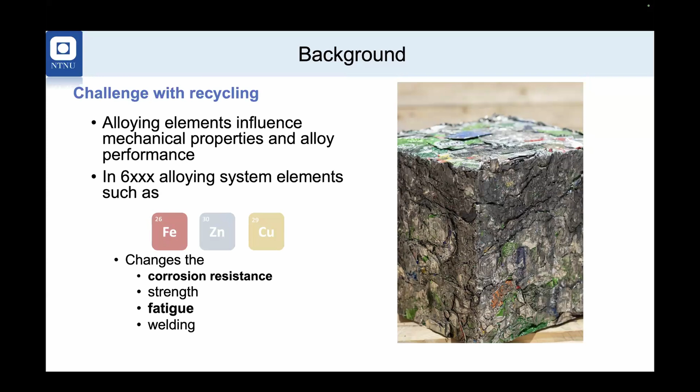And also, if you notice, Norway has a long coastline, so whenever we consider components for fatigue sensitive applications, it also comes along with corrosion. So for better design, it's imperative that we consider both fatigue and corrosion hand in hand. So to do that, first of all, let me introduce the type of alloys that we use.

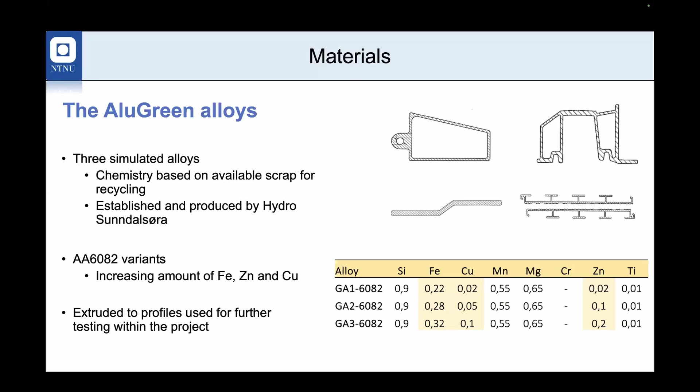Basically, we use 3 simulated alloys where, rather than using post-consumer scraps, we systematically increase the impurity elements like iron, copper, and zinc, so that it resembles post-consumer scrap. And the material is available to us in extruded condition. And what we considered is the variant GA3. This variant basically has the highest amount of impurity elements in terms of iron, copper, and zinc.

And basically, we carried out a high cycle fatigue test, as you can see here. And the specimens were extracted perpendicular to the extrusion direction. And additionally, we did some pre-corrosion, where we subject the material to intergranular corrosion as per method B in ISO for several different durations, like 1 hour, 4 hours, 12 and 24 hours. And we use 2 different conditions. One is as extruded without any surface treatment, and the second is as extruded followed by a surface treatment, that is glass bead blasted.

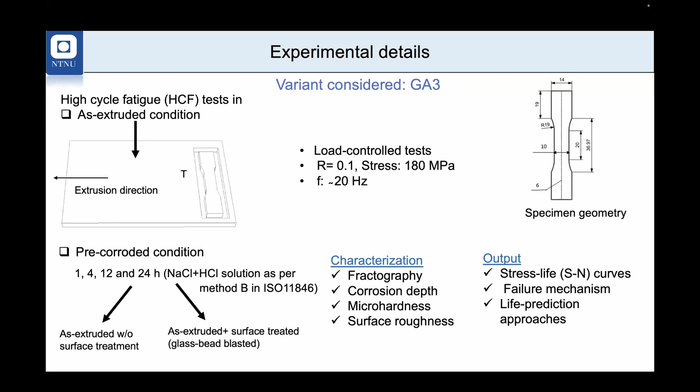And the fatigue testing we did at an R ratio of 0.1 at a stress of 180 MPa, and you can see the specimen geometry here. So we did a thorough microstructural characterization in terms of corrosion depth, micro hardness, post-fracture fractography, and surface roughness. And these are the outputs that we received: the stress life curve, failure mechanism, life prediction approaches. So before I go into the details, I want to show you some of the microstructure.

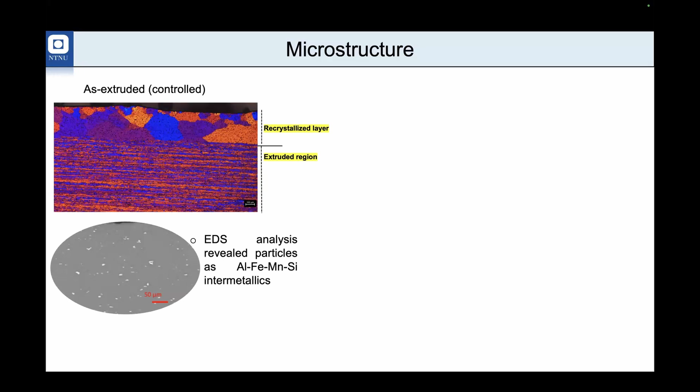This is the as extruded microstructure. As you can see, at the surface we have a recrystallized layer, with very big grains along with some small grains. And the recrystallized layer is followed by the extruded region, which has a very fibrous microstructure consisting of elongated grains. And also we have particles, which are basically iron-rich intermetallics, as revealed by EDS analysis.

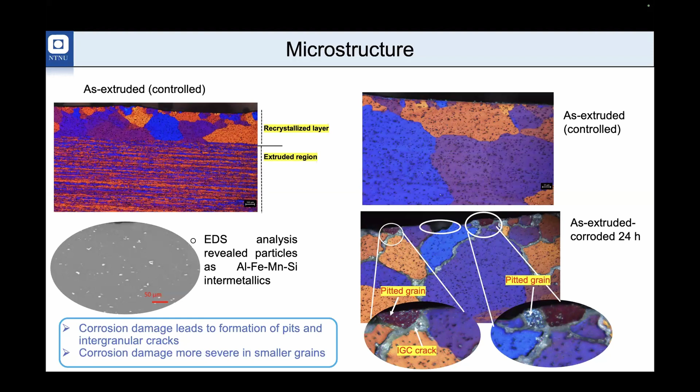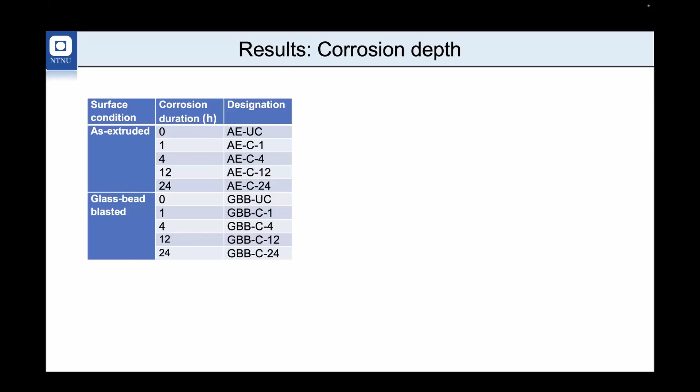And in contrast, if you see the microstructure of the corroded materials, it is different. You can see that there is significant intergranular corrosion, pits appearing especially in the surface region in the smaller grains, and also intergranular cracks appearing from there and then moving towards the interior. And we have used this designation so that we can characterize the conditions in a better manner for different corrosion durations.

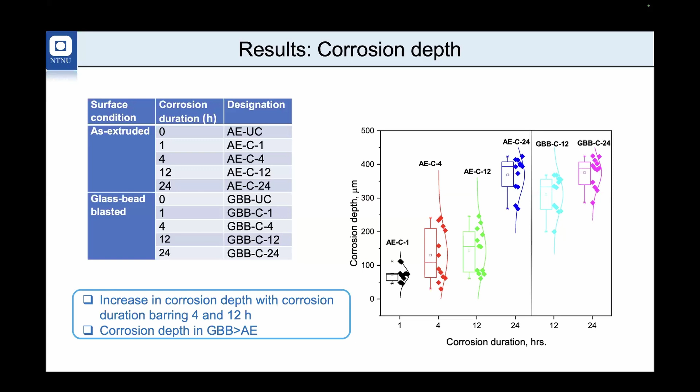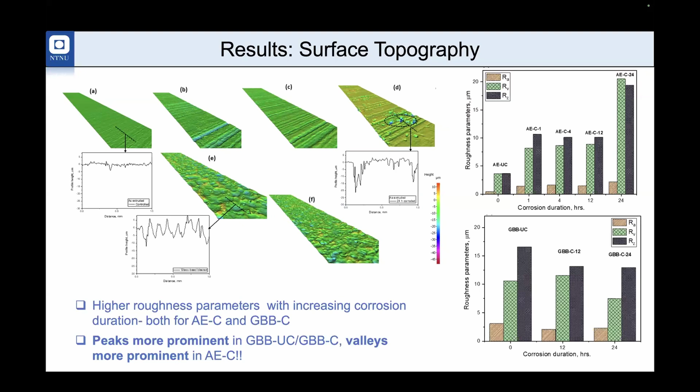Why is that? Because in case of the glass bead blasted condition, because of the impact of the blasting, the surface roughness itself is quite high, and it is characterized by the peaks. And when the material is corroded, the height of the peaks decreases. That's why this reduces the surface roughness.

We also did some microhardness characterization on the material, and you can see that the microhardness shows an increasing trend followed by a decrease, which marks the transition from the recrystallized to the extruded zone. And for the glass bead blasted, the microhardness is obviously higher compared to the controlled condition. The reason is that glass bead blasting induces some compressive residual stress and also work hardening. So obviously it would increase the microhardness.

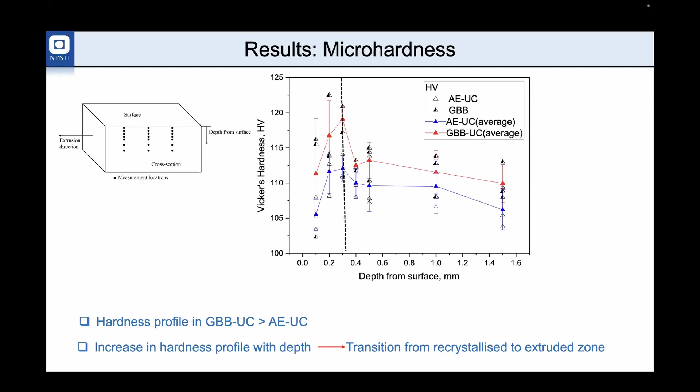Now I'll come to the main result, that's the fatigue. If you see the graph here, I have also superimposed the variation of the corrosion depth so that you can try to correlate how the fatigue life changes with corrosion duration vis-a-vis corrosion depth. With increase in corrosion duration, there is a drastic reduction in fatigue life, especially for a smaller corrosion duration, 1 hour, followed by a sort of saturating trend.

Surprisingly, the corrosion depth increases almost consistently with increase in corrosion duration. So even though there is an inverse correlation between fatigue life and corrosion duration or corrosion depth, this inverse correlation is not exactly synchronous.

And why is that? That's because fatigue is a very local damage. It requires a very small amount, just maybe 2 or 3 corrosion pits or a tiny intergranular crack itself, to initiate the crack. So even if there is a further increase in corrosion damage in terms of maximum corrosion depth, that is not very influential in further accelerating the fatigue damage. In other words, the fatigue damage gets saturated.

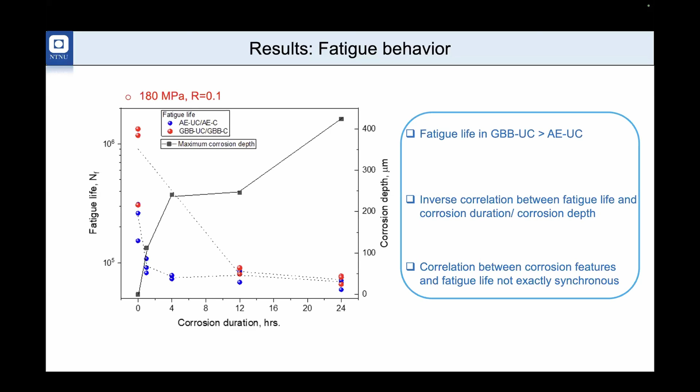If you see the fractography results, you can corroborate what I just said in the previous slide. If you compare the controlled condition with the glass bead blasted, the main difference is that in the control, the fatigue crack initiates from the corner of the specimen at one of the recrystallized zones. But in the glass bead blasted, the initiation zone moves slightly towards the interior.

This is because of the impact of the glass bead blasting, because of the significant amount of compressive residual stress that is developed, and as a result, the crack initiation zone moves slightly interior, and this is also the reason why you get a tremendous improvement in fatigue life.

On the other hand, if you compare these results with the corroded conditions, you'll see even for 1 hour corrosion duration, where the maximum corrosion depth may not be high, there are multiple crack initiation sites. And contrary to a transgranular crack initiation, you can see intergranular crack initiation, because the intergranular crack is already formed as a result of the prior corrosion. If you compare these results with a 24-hour corrosion duration, how does it change?

The difference you can see is that when the corrosion duration is 24 hours, the corrosion damage is higher, and that is reflected in terms of widespread corrosion pits or intergranular cracks. So the only difference you can see here is that compared to 1 hour, almost the entire recrystallized zone is filled up with intergranular cracks or corrosion pits.

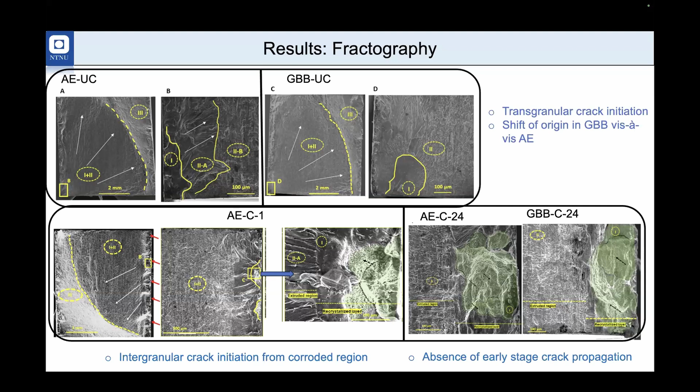So not only did it curtail the crack initiation phase, but it probably also curtailed a portion of the early stage crack propagation. So that's why, compared to 1 hour, if you go to 24 hours, that's because of the loss in the early stage crack propagation phase.

Now we also tried to delve into a bit of life prediction using the Murakami approach. As you know, using the Murakami approach, we basically consider some defects. Here there are no defects in terms of porosities, inhomogeneity or inclusions, but we consider the corrosion pits and the intergranular cracks as defects. For the effective area, what we did is make a contour considering those regions, and in this way we measure the defect size.

If you look at the graphs here, you will see that with increase in the corrosion duration, of course, the defect size will increase. And when there is an increase in the defect size, the fatigue life decreases. But as I mentioned earlier, this increase in defect size and the decrease in fatigue life are not exactly synchronous. This becomes more clear if you look at the graph on the right-hand side.

Here from the same defects, we measured the Kmax and plotted Kmax against fatigue life. You can see there is a good inverse correlation in the as extruded condition, but not in the glass bead blasted condition. Why not? Because in the glass bead blasted condition, the fatigue life is not entirely dependent on defects. It depends on many other factors, maybe the work hardening imparted by the impact of the glass beads or the compressive residual stress. So there may not be a one-to-one correlation between Kmax and the fatigue life.

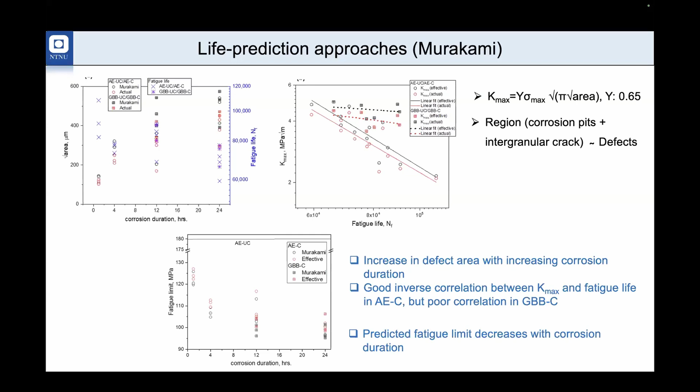So these are the main conclusions. The corrosion damage in glass bead blasted is higher compared to as extruded, and the fatigue properties are obviously better in glass bead blasted compared to as extruded because of the reasons I mentioned: compressive residual stress and work hardening. But in the corroded condition, the improvement in fatigue life in glass bead blasted is less. That's because there's significant curtailing of the crack initiation phase as a result of the prior corrosion.

The kinetics of the corrosion damage influence the fatigue life at smaller corrosion durations, like 1 or 4 hours, because beyond 1 or 4 hours there is a sort of saturating trend in fatigue life. And the life prediction approach per Murakami shows a good inverse correlation, but not so in the case of the glass bead blasted condition.

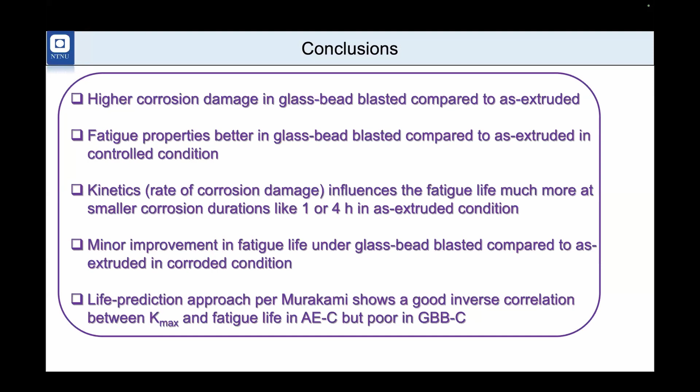So these are my recommendations for future life improvement. We should look for a suitable surface treatment method. For example, glass bead blasting can impart some work hardening or compressive residual stress, but we have not got enough evidence that it can also change the microstructure significantly. So treatments like laser shock peening could be a better option. We can also try to determine a critical corrosion depth. This requires extensive testing for smaller corrosion durations between 0 and 1 hour.

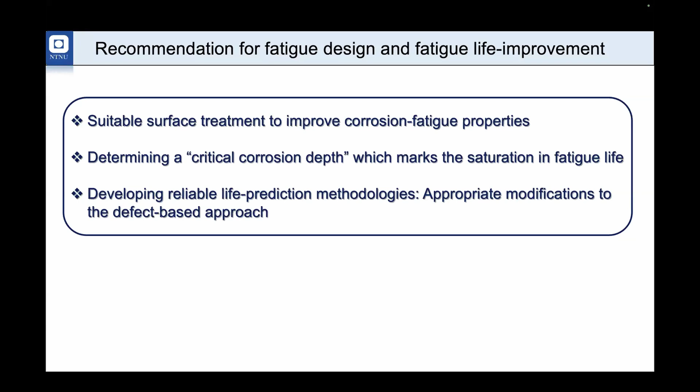Why is this critical corrosion depth important? Because it can tell us the minimum amount of corrosion damage that we should consider for fatigue design, without providing for the maximum corrosion depth. And also developing reliable life prediction methodologies: we should use appropriate modifications to the defect-based approach so that we can achieve better life prediction.